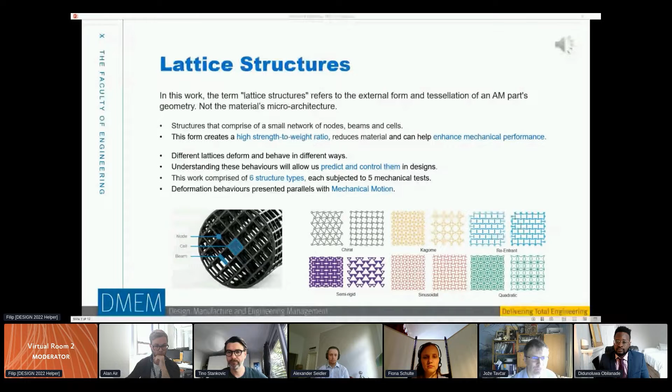This work utilizes 6 structure types, which can be seen in the bottom right, and each of the 52 variations were subjected to 5 mechanical tests. Deformation behaviors in these tests presented parallels with mechanical motion. In mechanics, there are 4 basic types of mechanical motion: linear, oscillation, reciprocation, and rotary. All these motions present parallels with lattice structure deformations. Therefore, there is a value proposition for a novel classification method that uses these 4 motions to categorize the deformations.

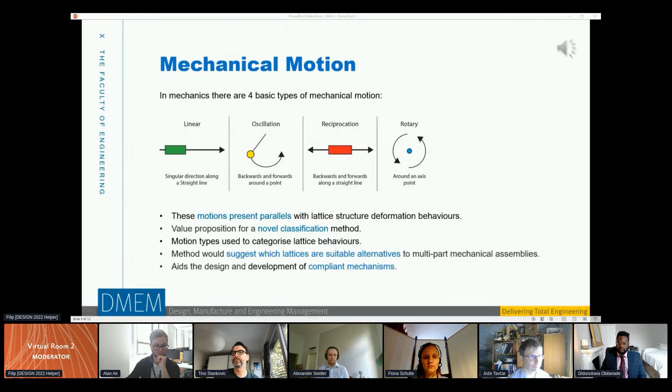This method would suggest which lattices are suitable alternatives to multi-part assemblies and would aid in the design of compliant mechanisms. Compliant mechanisms are flexible mechanisms that create motion through elastic body deformation. They're designed to replace rigid multi-part assemblies with a single flexible part.

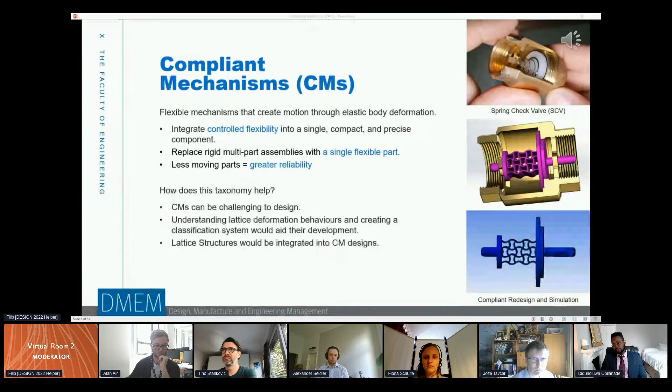Compliant mechanisms can be hard to design, but understanding lattice deformation behaviors and creating a classification system would aid in their development. Lattice structures could be integrated into the design of compliant mechanisms, replacing rigid parts with flexible controlled deformations. To the right, we can see a basic example of this theory in practice: a spring check valve redesigned to...

...replace the reciprocation spring with a lattice structure, reducing the number of parts. The original taxonomy uses only the 4 basic motions. However, during a data reanalysis, an issue was found within rotary motion. 2 variations of this motion were identified with no method of separating them despite clear distinctions.

These were lattices suitable for rotations greater than 360 degrees, but not less than 360 degrees, and vice versa. These findings uncovered a need to enhance the taxonomy motion themes further through the development of sub-motion themes.

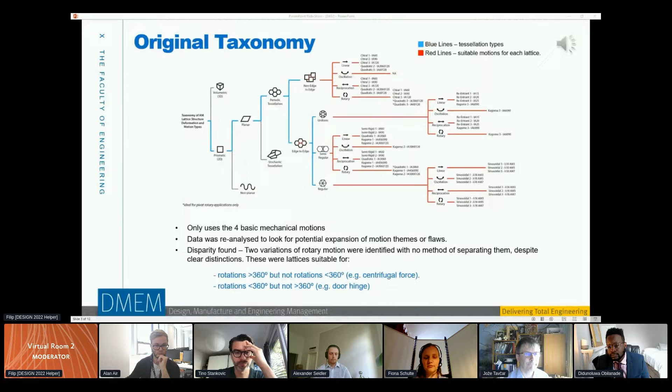The rotary motion theme was initially expanded into 2 sub-motions: rotations more than or equal to 360 degrees, and rotations less than 360 degrees. These submotions were then expanded further through continuous and repeatability to indicate singular and dual directions of the rotation.

Oscillation is challenging to identify in lattices. Typical oscillation motions are not directly attached to their pivot point. However, oscillation motion is also present in flexure, a motion involving a structure being bent between its pivot point and an end point. Results in MT5 show this motion is possible through lattices.

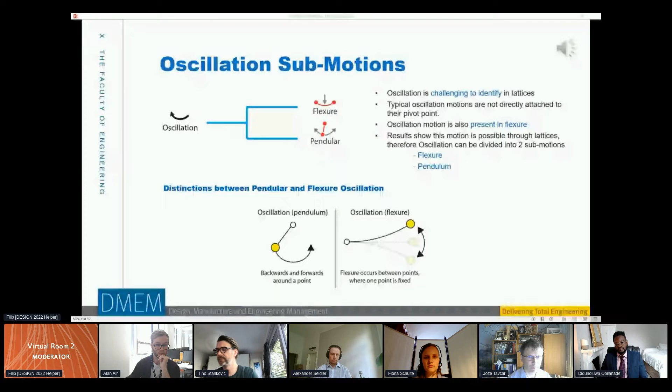Therefore, oscillation can be divided into 2 submotions: flexure and pendular. Reciprocation motion was expanded into 3 submotions: compressive, balanced, and tensile.

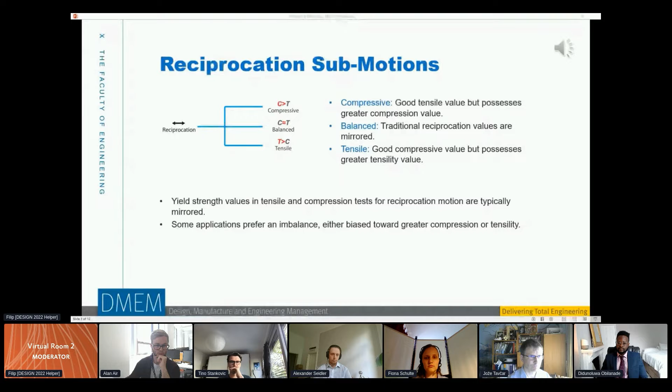Yield strength values in tensile and compression tests for reciprocation motion are typically mirrored, i.e. 100 newtons versus negative 100 newtons. However, some applications prefer an imbalance, either biased towards a greater compression or tensility. Therefore, it was important that this preference be reflected in the submotions.

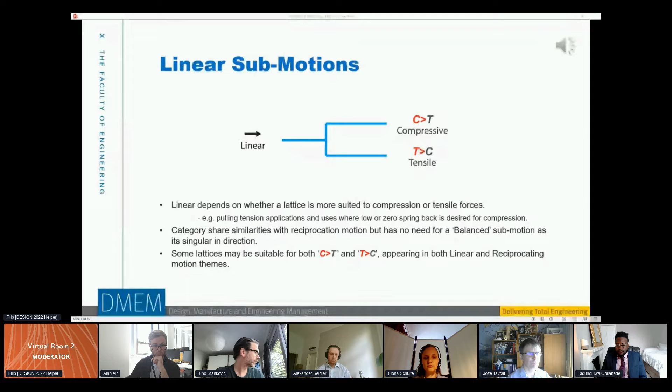Linear categorization depends on whether a lattice is more suited to compression or tensile forces. It is noteworthy that lattices may be suitable for both and overlap with reciprocating themes. As such, linear categories share some similarities with reciprocation motion. Thus, linear lattices can be subcategorized as compressive linear and tensile linear.

And here we have the final taxonomy with submotions included. A simple translation of an AM lattice deformation and motion taxonomy is crucial in its usefulness to designers and engineers, indicating what motion each lattice can replicate.

An ideal method of doing this is through a visual illustration in the form of a dendrogram. It facilitates a breakdown of the behaviors, properties, and characterization of the lattice structures available. This illustration augments the original taxonomy to produce an enhanced dendrogram for AM lattice structure deformation and motion types, including submotions.

For this work in 2D tessellation patterns, only areas relevant have been expanded on thus far. These are prismatic, planar, and periodic tessellation categories. In addition, there has been a change to the color coding used to create greater clarity. Sections are now deciphered using the colored lines above the dendrogram. The headers correspond directly with the sections below.

The yellow section details the key underlying concepts that describe each structure's tessellation type and how these geometries are arranged and constructed. The green section highlights suitable motion and submotion themes for each lattice.

Lattices may be deemed suitable for more than one motion type, depending on experimental results. This helps identify more adaptable samples and does not signal any drawbacks within a sample, should it qualify for multiple types. The most adaptable structures thus far in experiments are sinusoidal and kagome.

In summary, the aim of this work was to augment a novel taxonomy we'd previously developed. The taxonomy in this paper presents a unique approach to lattice structure classification in additive manufacturing. It links the deformation behaviors of lattices to the 4 basic types of mechanical motion, which expand into 13 sub-motions. This method will enable users to find ideal structures for the development of AM-compliant mechanisms by integrating suitable lattices into...

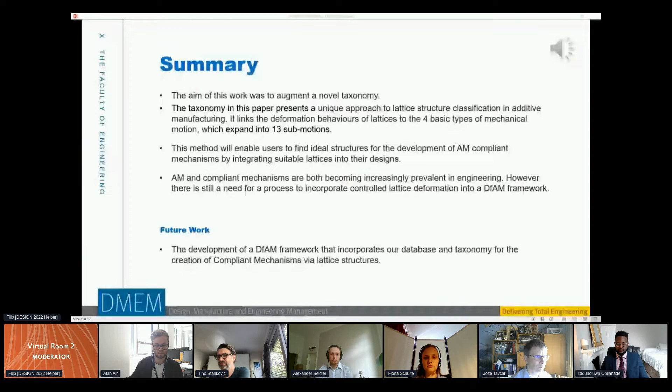...their designs. AM and compliant mechanisms are both becoming increasingly prevalent in engineering. However, there is still a need for a process to incorporate controlled lattice deformation into a DFAM framework. Our taxonomy and database are key to this.

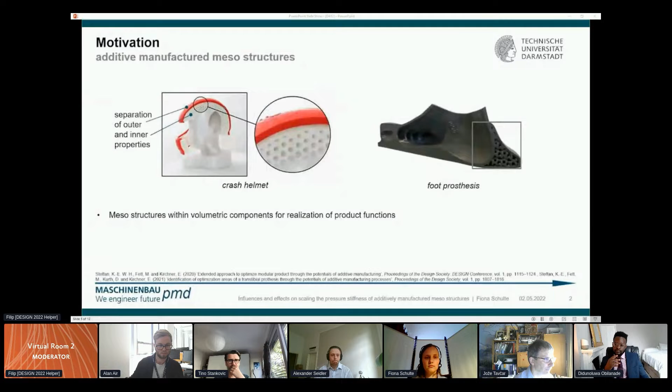Mesostructures are used in volumetric components like the shown crash helmet or the foot prosthesis to realize certain product functions. In the two examples, the potentials of separation of properties of the outer shape and the inner properties, as well as the grading of local properties according to requirements, are utilized.

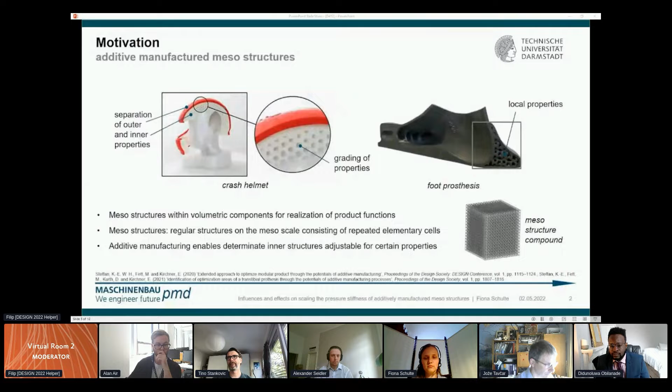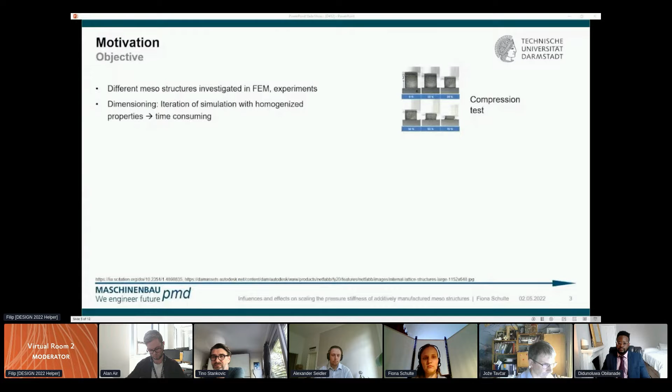Mesostructures consist of regular structures with repeated elementary cells on the mesoscale. These determinate inner structures become manufacturable using additive manufacturing technologies. The properties of different mesostructures are investigated in finite element analysis or experiments. Yet dimensioning of the structures for applications is realized by the iteration of simulations, usually using equivalent homogenized properties. The iteration, though, is time-consuming.

Hence, systematic and purposeful design requires a mathematical description of the interrelation between the design parameters of a mesostructure's elementary cell - the length, height, and width of the elementary cell's envelope and the structural thickness - and the mesostructure's properties. Therefore, a model for this interrelation is aspired.

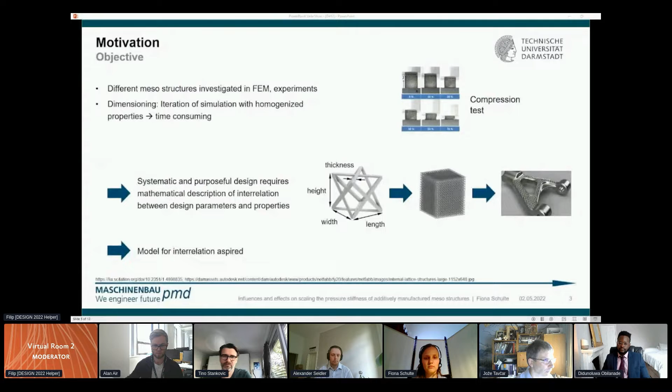The mesostructure's stiffness properties are identified using a finite element method simulation model. As an exemplary load case, uniaxial pressure is examined here. To simulate the pressure stiffness of a mesostructure, a single elementary cell is modeled between two rigid plates with frictionless contact conditions. The lower plate is fixed, while the upper plate is impinged with a displacement in vertical direction, and the response force in the reference point is output.

To take the interaction of cells within a mesostructure compound into account, periodic boundary conditions are applied. These boundary conditions set the displacement of opposite nodes within the FEM mesh to be the same, like the elementary cell borders to another identical cell.

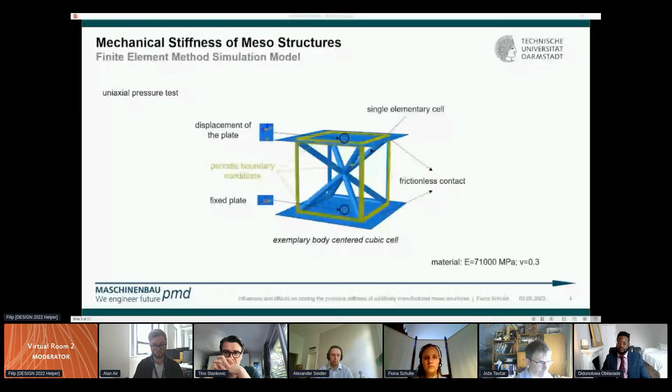The FEM simulations do output the overall stiffness, but provide little information about the contribution to the stiffness of the different geometrical features within the elementary cell. Thus, an analytical model for the pressure stiffness is derived from known mechanical interrelations and their description, supplemented with expected effects of the elementary cell's geometry.

The analytical model of a face-centered cubic cell is shown here. To reduce the 3-dimensional geometry to 2 dimensions, the struts of the upper and lower respectively surface are projected to one plane. Now 1/8 of the cell is considered, while forces and stiffnesses are portioned or added respectively to achieve the overall stiffness of the cell.

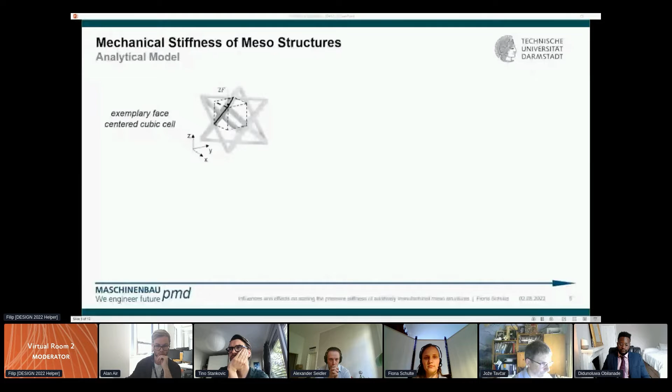The force path through the FCC cell can be split into two parallel paths. The first path is modeled as a framework consisting of bars and showing a deflection depending on the tensile compression stiffness of the framework.

The second path is modeled as a bending beam following the bending line with a double-sided clamping, additionally considering shear because the struts are stocky, and a compression arising through the hindrance of deflection at the knot. Furthermore, the knot areas correspond to a soft clamping instead of a fixed clamping, which is regarded in the bending line, considered here by an additional deflection. The partial stiffnesses of both load paths are summed up to the total compression stiffness of the cell.

To provide a model for the calculation of the properties depending on the design parameters - strut thickness d and edge length L of the envelope - the result of the FEM and the analytical model are fitted with different approximation equations.

Regarding the accordance of the fit function and the results and the physical background, the power function is chosen to be suitable. The power function is advantageous in terms of its invertibility, which allows to derive backwards the design parameters for a certain stiffness.

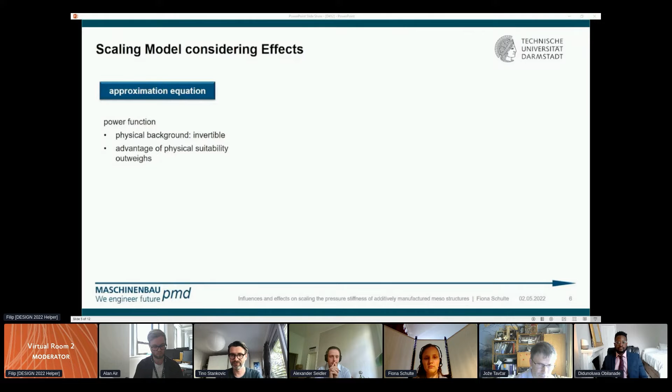Comparing the FEM and the analytical results of the overall as well as the partial stiffnesses reveals that for little D to L ratios, the framework's tensile compression stiffness is dominant, while for high D to L ratios, the bending stiffness increases more strongly and dominates the curve slope.

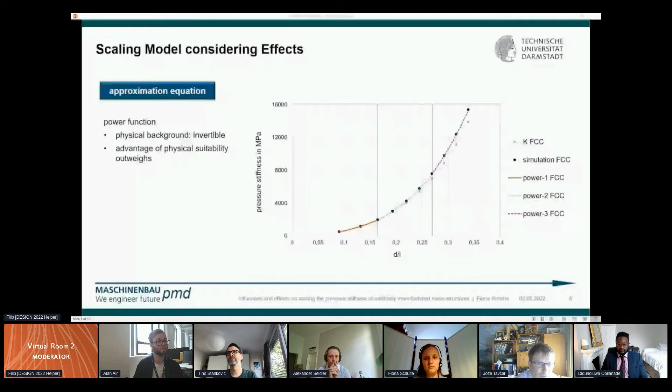Considering the different dominating underlying stresses for the stiffness, the approximation equation is subdivided into three parts, which show even closer agreement with the FEM results within their particular areas, as shown in the graph here.

Summing up, for the systematic and purposeful dimensioning of mesostructures, a model for describing the relation between the design parameters and the mechanical stiffness is aspired. This is achieved by a power function approximation that describes the stiffness depending on the relation of the strut thickness to the edge length of the cell.

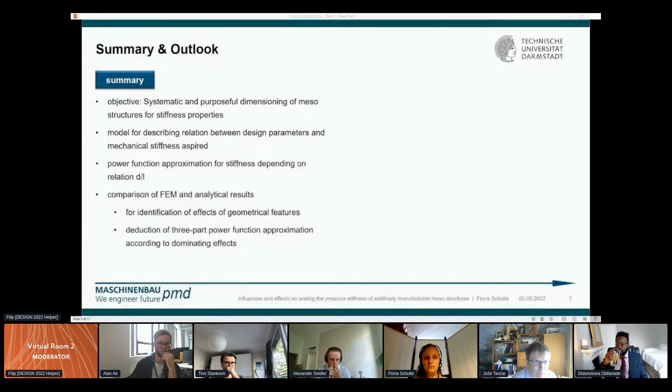The comparison of the approximated FEM results and an analytical calculation account for the identification of effects of geometrical features on the stiffness and the deduction of a matched three-part power function approximation.

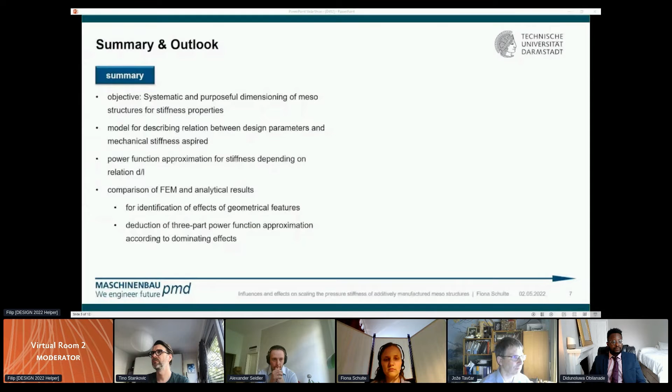The model shall be transferred to further load cases like shear, bending, or torsion, and for other elementary cells, which could be, e.g., cells with different edge length relations, and further cell types like plate or shell lattices. For complete dimensioning, furthermore, the strength and buckling resistance have to be modeled.

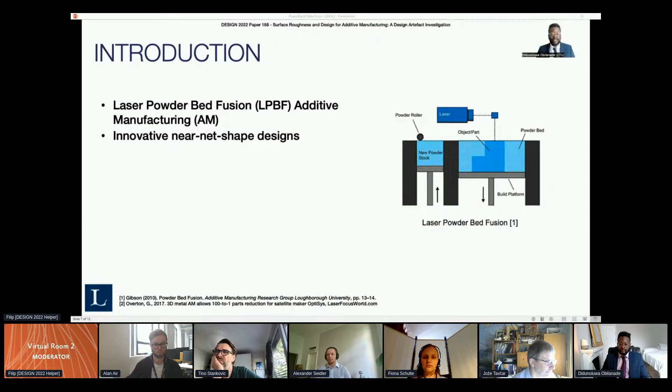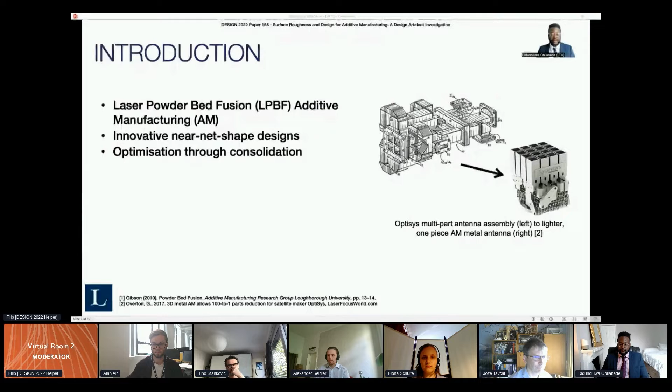LPBF is of high interest in industries such as aerospace, as the laser's position brings a high degree of design freedom, enabling production of near-net shape, innovative, weight-saving parts. For example, satellite maker Optisys used LPBF to enable a 100-to-1 part consolidating design for a metal microantenna, achieving a 95% weight reduction. Consolidated AM parts can be complex, often requiring support structure.

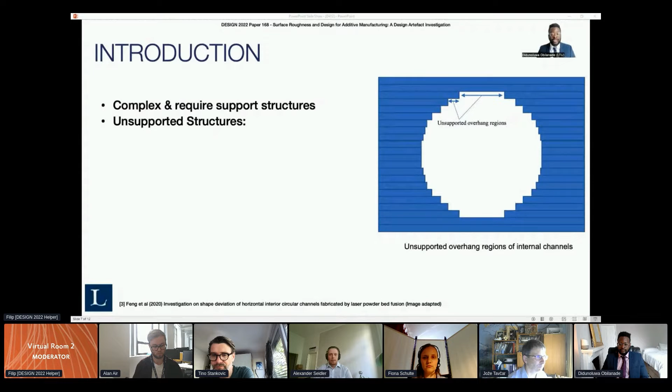However, for designs with closed internal sections, support cannot be included due to being impossible to remove post-build. These unsupported areas cause the melt pool to sink into the powder bed, and unsolidified powder leads to rough surfaces and dross formation, causing deviations from the part geometry.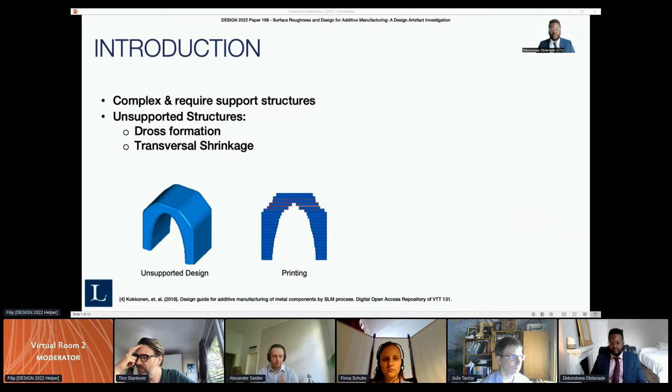Additionally, without supports, transversal shrinkage occurs, as when two separately built islands meet, the residual stresses at their junction layer pulls the material together, and like dross formation, cause rough surfaces and geometric deviations from the part design, hence intrinsically linking rough surfaces to design choices.

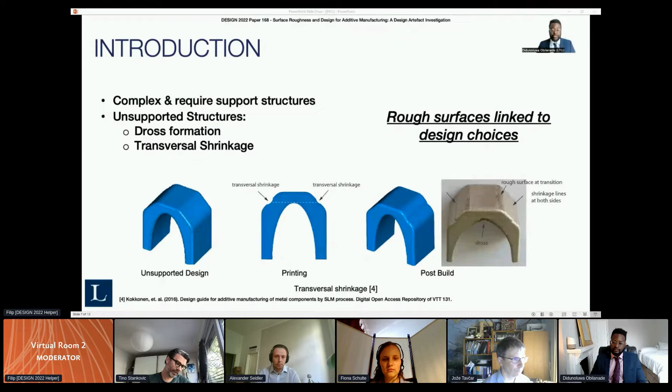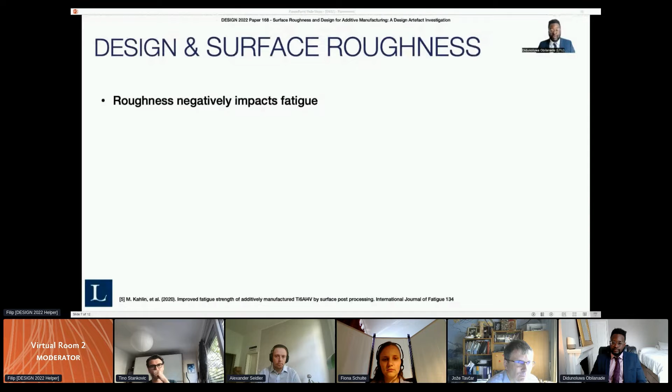Literature indicates that these surface roughness defects have a negative impact on fatigue performance. Consequently, the benefits of part consolidation could compromise material properties, meaning there lies an intrinsic material-machine geometry relationship of parts made through LPBF. While post-processing is a common method of surface improvement, consolidated parts can make this difficult due to areas being inaccessible by design.

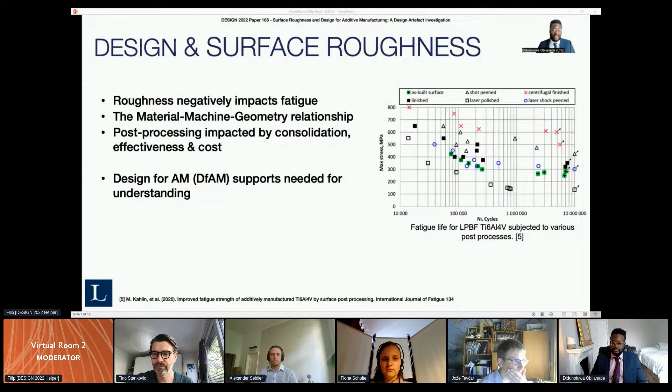Also, there are a variety of methods with different levels of effectiveness and varying costs. Thus, there is a need to develop design for AM supports that provide an understanding of design's relationship to surface condition and resultant material properties.

Therefore, our paper presents the industrial use of a DFAM process that uses product-specific AM design artifacts. The AMDA process is a systematic way to identify, explore, and decrease AM design uncertainties when inspiring, evolving, and validating AM design solutions. Here we present an evaluation of results and the design logic through two iterations of the AMDA process, as it is used to investigate uncertainties related to surface roughness during the design of a rocket engine turbine manifold with a consolidated design.

As it is not possible to remove support structure from the turbine's internal gas pipe, a series of design artifacts were first made to evolve possible unsupported roof designs. Once a roof design solution was chosen, there was the uncertainty of the impact of design-related surface roughness on the mechanical properties of this roof section.

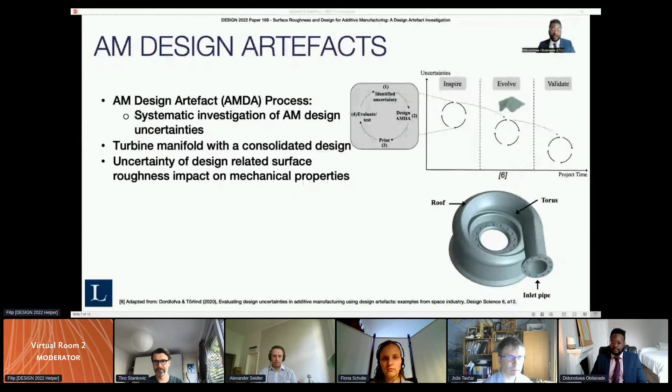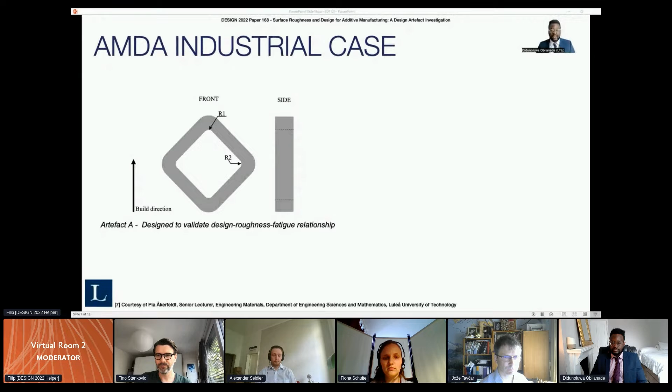Hence, to validate the roof design, an artifact was designed to be fatigue tested to investigate this feature. This artifact, Artefact A, was designed to resemble the internal roof geometry of the manifold design, investigating the roof radius at a 4 mm radius, R1, and comparing it to a less rough surface of the same radius, the reference surface, R2, to the right.

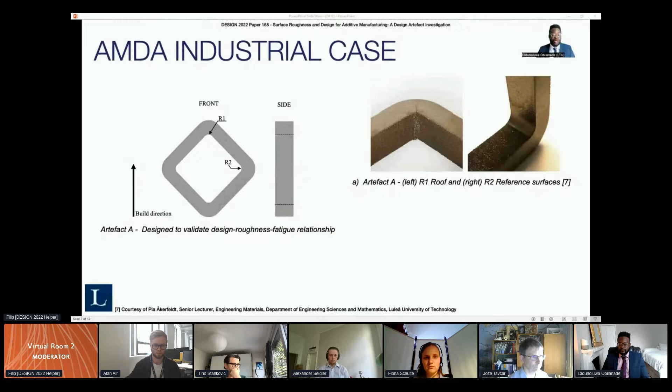Shown in Figure A, R1 had a high level of dross formation, creating a much rougher surface compared to that of R2. Also, transversal shrinkage has occurred, indicated by a distortion line at the roof junction layer. Ten A artifacts were produced, and we found that the average R1 radius was 2.7 mm instead of 4, whereas the average for R2 was 3.9.

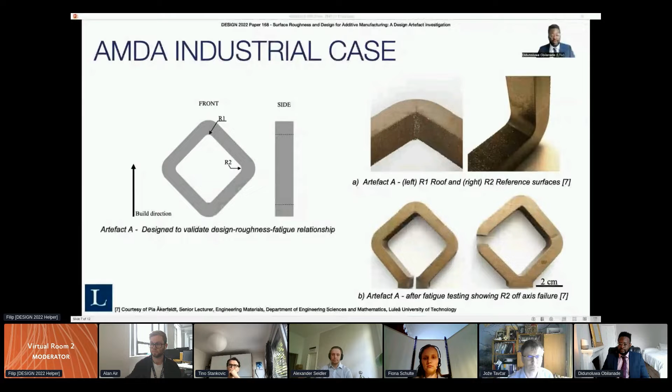Additionally, shown in Figure A right, where the artifact arm design changes from the R2 radius to an unsupported 45-degree overhang surface, a transition line from smooth to rough surface was noted, causing the point of fatigue failure at R2 to occur off-axis, as shown in Figure B right.

To account for these unexpected failure behaviors, a second iteration, Artefact B, was designed with two major design changes to better focus the artifact on the studied uncertainty. Firstly, a tilt was introduced to counteract the impact of the transversal shrinkage and reduce the dross formation at R1. With a tilt, the R1 junction plane gradually connects over several layers, reducing the impact of thermal stresses as these layers cool.

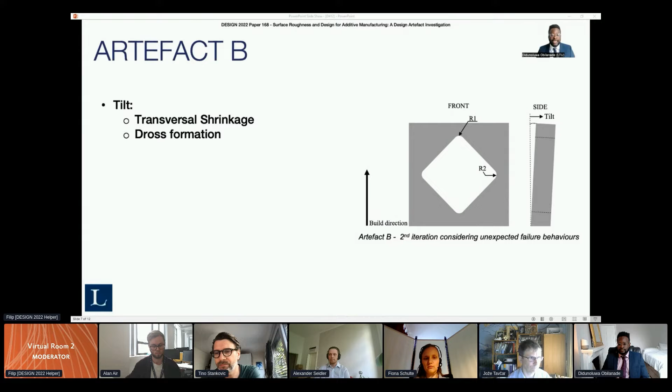Additionally, Artefact B's square geometry should address the R2 off-axis failure due to the transition roughness by causing the failure to occur where the arm thickness is smallest.

The A artifact aimed to validate the understanding of the design roughness fatigue relationship for a 4 mm roof section. Instead, it identified previously unknown process characteristics that impact the artifact design. Hence, the A artifact evolved our understanding of the AM process and led to the design of the B artifact as we aim for a more accurate representation of the design uncertainty under investigation.

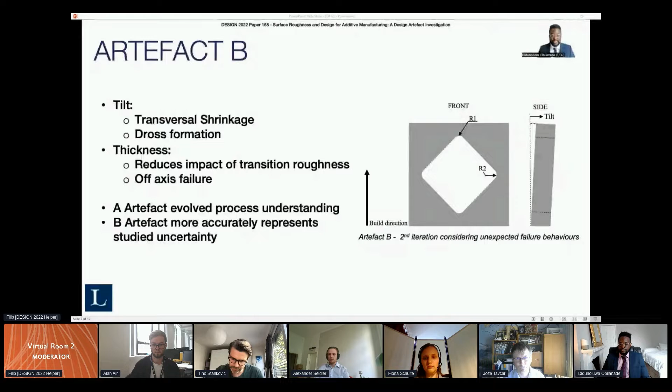In this case study, the AMDA process has supported the detailed design through providing understanding of process characteristics impact on design whilst investigating a design consideration.

In each iteration of the AMDA process, a new design artifact is built, which once tested, either exposes an unknown uncertainty and evolves the design understanding, or reduces uncertainty through design validation. Each iteration reduces the number of uncertainties while the designer obtains a better idea of the AM process and how to evolve the chosen design to account for the design uncertainties.

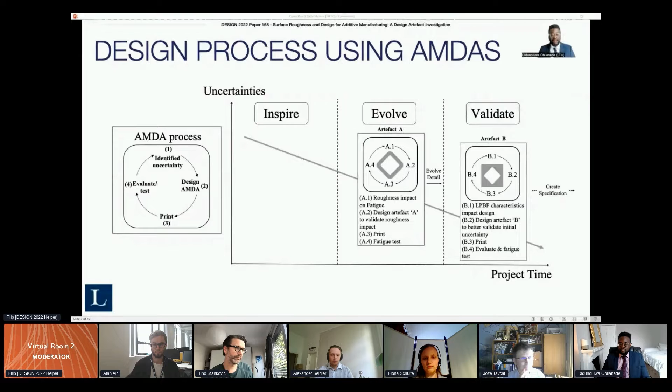Generally, come the final artifact iteration, the designer has reduced uncertainties and is provided with a clear understanding of design's effects. Thus, ideally, a design specification with no remaining uncertainties can be made that enables the validation of a final design solution. The AMDA process in practice has highlighted design issues that need to be considered when designing metal AM parts with closed internal sections.

When designing the first artifact, a designer uses their current AM knowledge to focus the artifact on the main design uncertainty. Consequently, their level of AM knowledge will impact how fundamental the uncertainties are that need investigation.

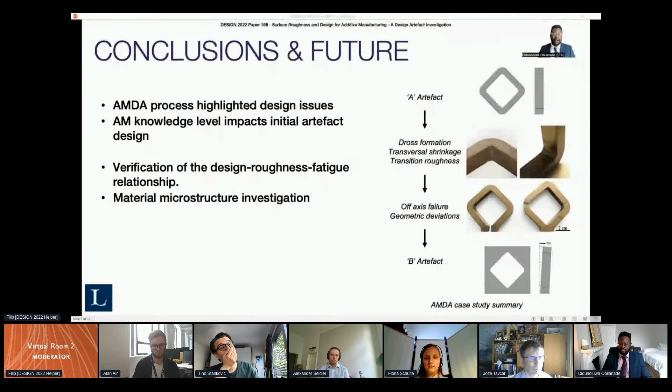Our future work will focus on evaluating the B artifact design changes enable the verification of the design roughness fatigue relationship. Also, the B artifacts will have two designs, one to test the as-built surface and a second to test a machined surface, investigating microstructural fatigue performance design factors.

Additionally, work should focus on developing the AMDA process for generic uncertainties, providing design engineers with support when exploring the capabilities of AM. Thank you for listening.

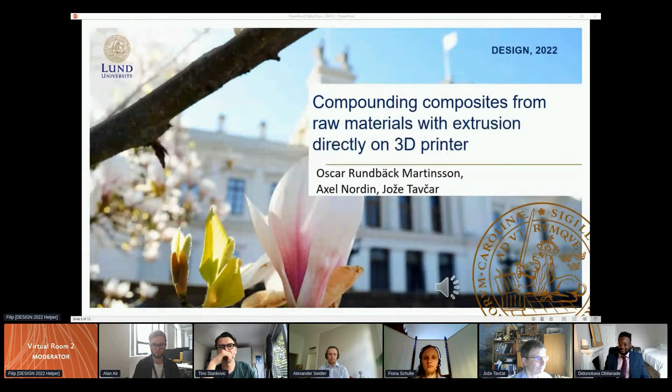Ladies and gentlemen, together with my colleagues Oscar Rundbäck Martinsson and Axel Nordin, we conducted research on compounding and extrusion of composites directly on 3D printer. My name is Jože. We are coming from Lund University, Sweden, from Product Development Division.

Additive manufacturing encourages design creativity and makes access to machining facilities affordable. A 3D printer, which enables extrusion and printing composites directly from the raw materials, was designed, assembled, and tested.

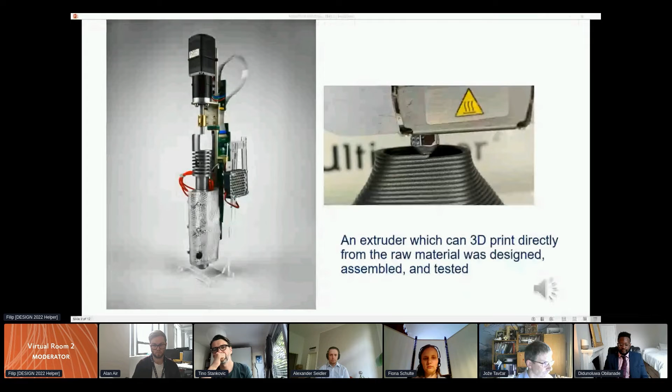The materials used in 3D printers based on extrusion are most commonly in a filament form, and it costs between 15 and 30 euros per kilogram. It can be a cost limitation in many cases. Pellets or even recycled plastics are significantly more affordable. There are already some interesting commercial solutions, such as Direct 3D.

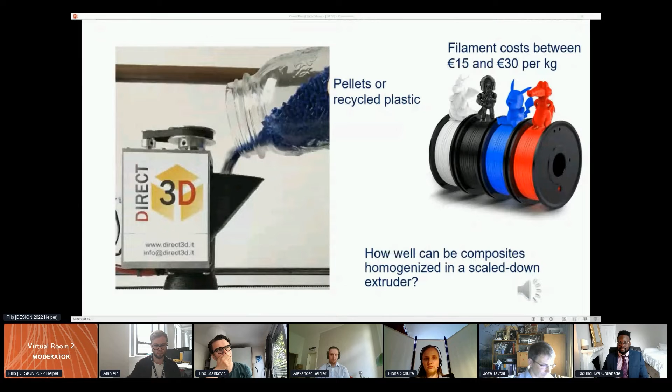Our research question was: can we produce well-homogenized composites in a scaled-down extruder? The following steps were used during our research: define, measure, analyze, improve, and control. The steps were repeated in several iterations. The goal was confirmation of research hypothesis with a practical experiment. Therefore, several versions of extruder were designed and tested.

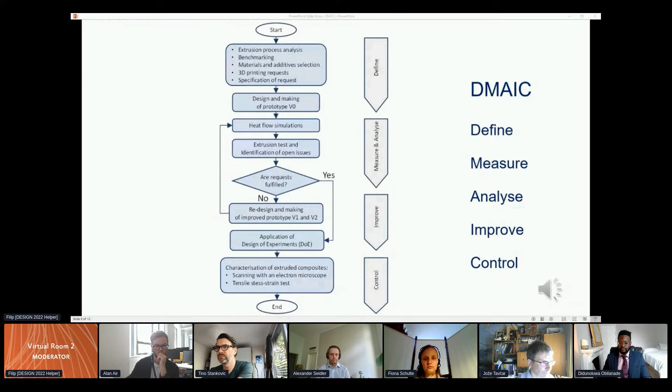The screw design has a significant impact on the dispersion of the additive throughout the matrix. On one hand, twin screw design assures better material mixing. On the other hand, we wanted to keep the design simple.

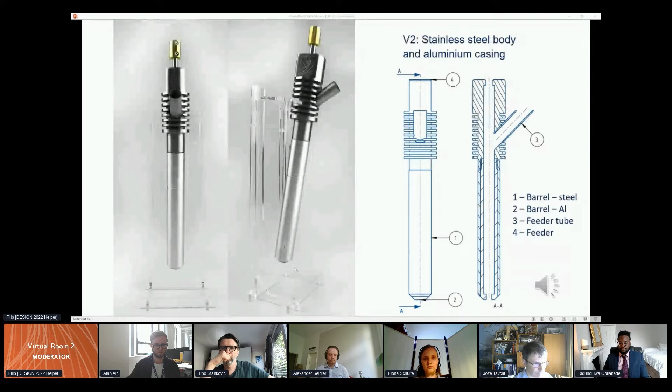The extruder was developed in several iterations. A modular design was used. Parts were created and assembled in different combinations. Heat and wear resistance of materials were considered too. At the end, the decision was taken to use the single screw extruder design due to space constraints and promising test results.

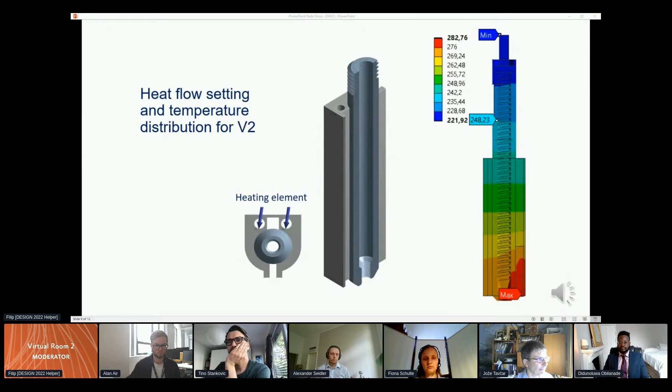We installed two 40 watt heating elements. The casing was covered with a thermal insulation shield, which limited the heat radiation and helped to stabilize the temperature. Finite element method simulations were made with the goal to understand better the dispersion of heat through the assembly. Parts made from stainless steel were compared with aluminum ones.

Tests with pure PLA pellets were performed with variation of extruding parameters, screw rotational speed, and the composite temperature. We conducted two-factor design of experiments. The results show the relations between parameters and yield strength. The optimal parameter values were later used in making test samples.

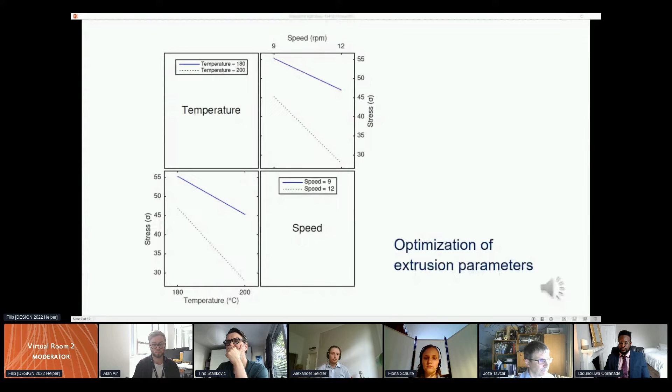The material selected for the matrix was PLA, which is well suited for additive manufacturing. It is biodegradable too. The additive materials used are wollastonite fiber and powder of aluminum. Wollastonite has potential in replacing more expensive reinforced fillers such as glass fibers due to low cost and needle-like structure.

Wollastonite increases tensile strength by up to 30%. Aluminum alloy powder with 10% silicon was used as the second additive.

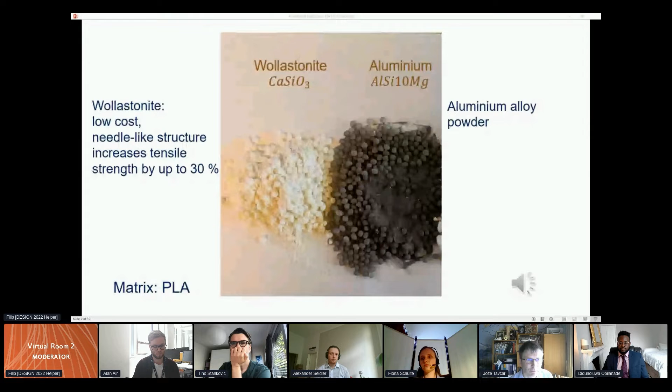The samples were analyzed with a scanning electron microscope. The image shows presence of elements. If we compare mapping, we can see aluminium and silicon are located in the black spots of carbon and oxygen. That means both groups of elements exclude each other.

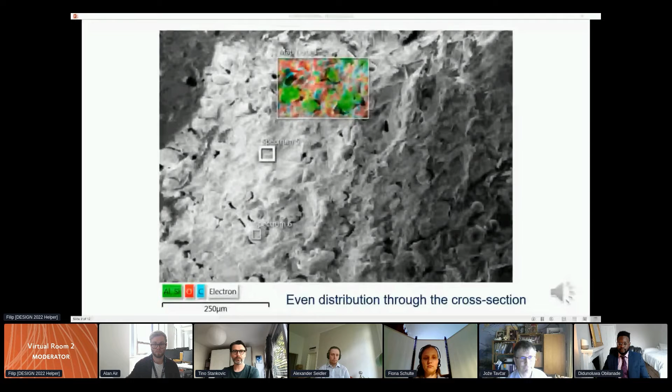On one hand, wollastonite improved yield strength by 22%. On the other hand, aluminum has minor impact on mechanical properties.

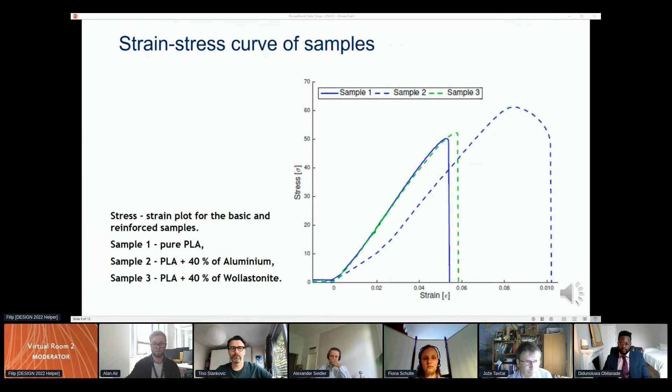What are our conclusions? Compounds can be well mixed in a scaled-down extruder. It was confirmed: the tested matrix and additives extrude and mix well.

There's a plan to test several new combinations of metal powders, color pigments, and different bio-based reinforcements. Additional variation and improvements of the extruder screw design is planned too. That's it. Thank you very much for your attention.

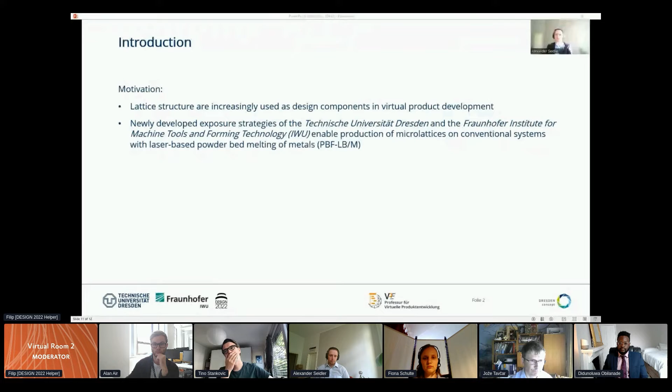However, the fabrication of metallic microlattices with the PBF-LB process is very challenging. That is why the Technische Universität Dresden and Fraunhofer have developed new exposure strategies. Unfortunately, the established approaches to stiffening lattices cannot be implemented on such systems due to the production constraints imposed by the new exposure strategies. Consequently, the research presented here is focused on developing a proposal for a manufacturing-friendly stiffening approach for microlattices.

There are several geometric and topological approaches for manipulating the stiffness of lattice structures. In the geometric approaches, parameters such as the beam diameter or the cell dimensions are manipulated based on pre-calculations, as shown in the approaches of Wu and Zhu.

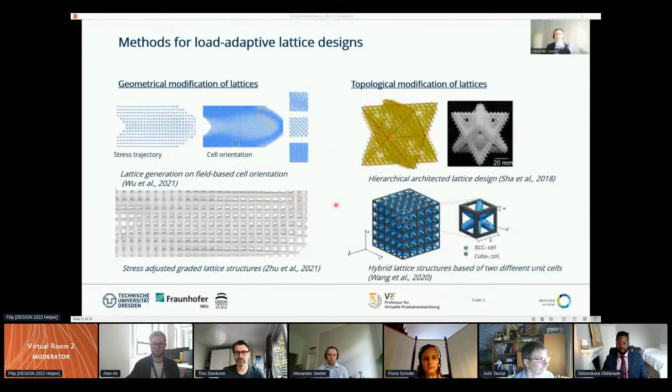In addition to these, there are also approaches to change the stiffness of the overall structure by combining and integrating different cell types in a lattice structure, as for example in Wang's approach. Alternatively, there are approaches in which the cells are arranged in a particular way to affect the stiffness of the overall structure, such as the approach of Sha.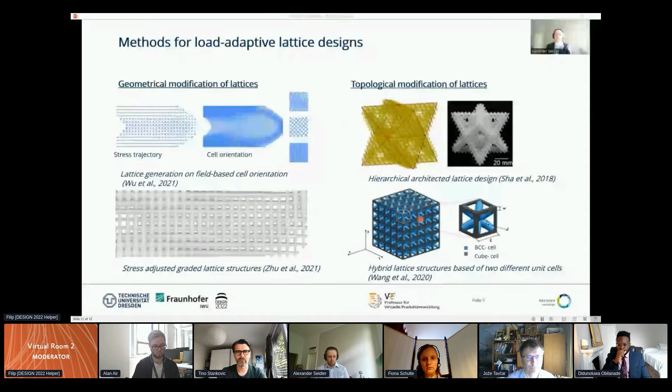However, these approaches presented here cannot be implemented with the PBF-LB process, since manufacturing boundary conditions explained in the following are violated in all of these approaches. For a support structure-free production of microlattices, which is needed, only a beam orientation of more than 20 degrees skin-down angle can be manufactured. So stiffening approaches such as those according to Wang and Wu cannot be realized.

In addition, microlattices cannot be produced with conventional contour hatch exposure strategies shown here, since numerical inaccuracies due to the mesh-based description in the scan strategies lead to uneven energy input in the printing process, which results in necking effects of the beam as well as strong powder adhesions.

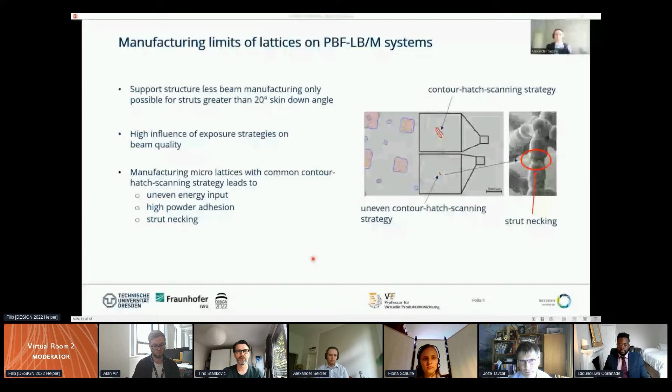As a result, new exposure strategies for the production of lattices with beam diameters in the micrometer range were developed. During slicing, the lattice beams are described with either a cross, a weighted cross, or a line exposure strategy, depending on the beam diameter.

With these strategies, a uniform energy input is realized, resulting in more uniformly shaped beams with lower powder adhesion. However, such good qualities can only be realized for uniformly thick beams, which means that approaches such as Zhu's approach also cannot be realized with this manufacturing technology. That is why a new proposal for stiffening microlattices under the mentioned condition is needed.

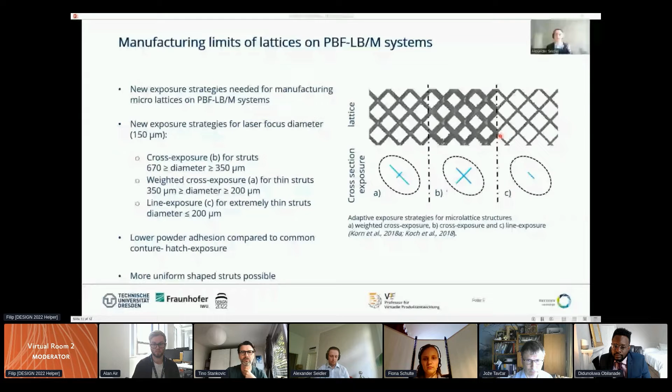Based on the above manufacturing conditions, a new cell design was developed. The basis cell shown here is supported by additional self-similar subcells of smaller dimension, which relieves the beams of the basic cell and distributes the load over the entire structure.

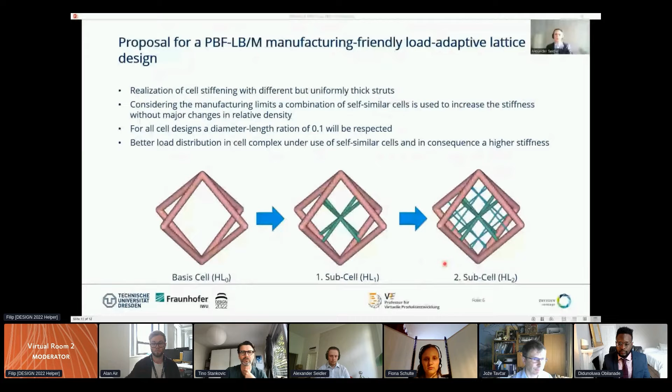To evaluate the influence of the additional subcells on the stiffness behavior of the overall structure, numerical simulations were used. A uniaxial compression test was simulated, for which the cell was fixated at the bottom and loaded on the top with a displacement of 0.1 millimeters.

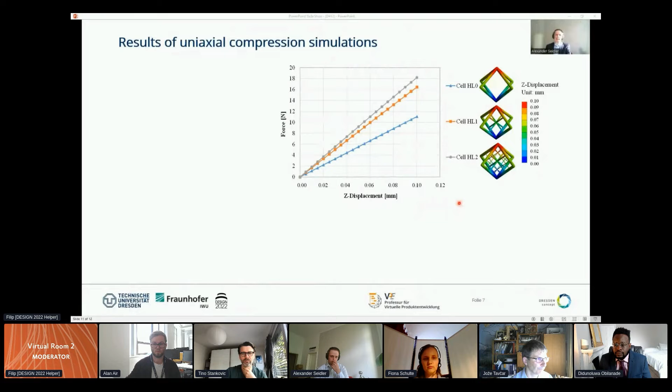The required force for the deformation of each cell design is shown in the chart, and based on these, the compression stiffness was calculated. Comparing the results of all self-similar cell designs with the base cell, the stiffness increased by 49% by inserting one subcell and by 64% inserting another cell.

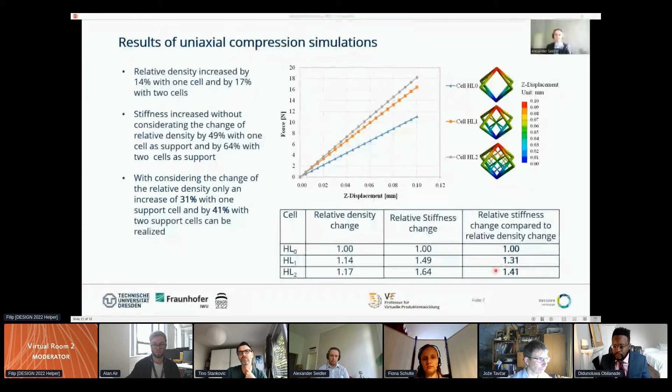However, the relative density also increased with respect to the base cell, by 14% inserting one subcell and by 17% inserting another cell. Therefore, considering the lightweight aspect, the change in stiffness is put in relation to the change in relative density. The resulting change in relative stiffness compared to the base cell increased by 31% by inserting one subcell and by 41% inserting another subcell.

In addition, the proposal was checked for production friendliness on a PBF-LB system. A complex lattice was designed, and for slicing the structures, a cross-exposure strategy was used for the base cell shown in red, a weighted cross-exposure strategy was used for the first subcell shown in purple, and a line exposure strategy was used for the second subcell shown in green.

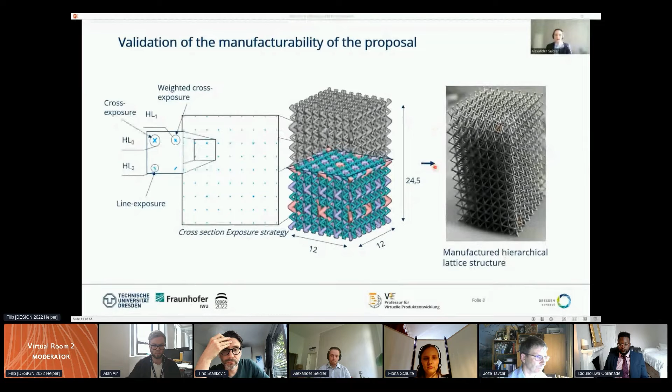As shown on the right, the successful printed structure.

So all in all, in this study, a new method for stiffening metallic microlattices for PBF-LB systems was presented. Initial numerical simulations have shown that the relative change in stiffness could be increased by 41%. In addition, the manufacturing friendliness of the design was demonstrated by the successful fabrication of a complex structure.

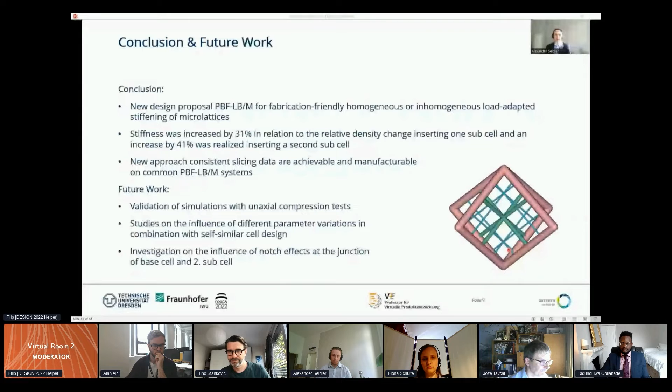In future, the numerical investigations must be validated with uniaxial compression tests, and furthermore, based on the self-similar lattice design, the influence of further parameter variation, such as diameter or cross-sectional shape, should be investigated on the stiffness behavior

of the overall structure. These were my references. Thank you very much for your attention.

Rather than this effort we've done, which is quite time consuming now, the hope is that over the years, as more knowledge and science is brought about it, models of this surface roughness phenomenon will be able to be made, that will enable designers to have a much easier process of understanding how their surface roughness will impact their design, because there are so many different aspects - the design of it, the level of surface roughness, the interaction of that surface roughness with the material properties. Future work we've looked at is the material microstructure and how that's influenced by the amount of surface roughness left on there. So yes, I would love to have modeling, but right now my scope is way too small to conduct that.